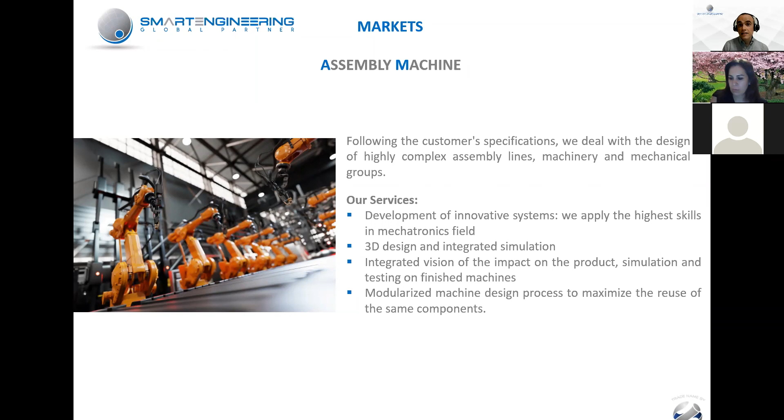The pharmaceutical sector could be considered a particular area of the packaging and assembly sector. Pharmaceuticals require basically the same competencies, but with higher attention to clean design, final product, protected environment, and extreme accuracy and reliability.

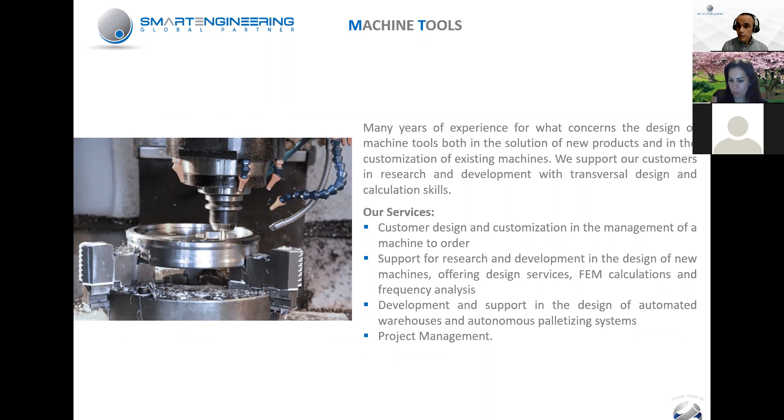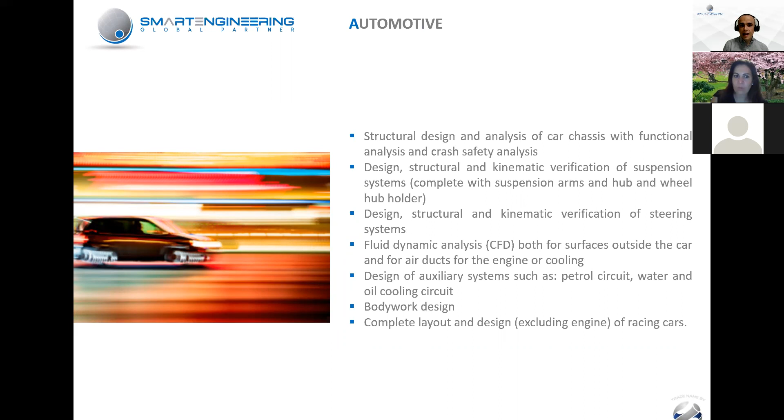Oil and gas markets require high skill in structural design and verification. Machine tool requires experience in the most precise and accurate movement solutions and structural calculation. Automotive requires very high skills in calculation, analysis of structures, and fluid dynamics, but also surface modeling and bodywork design if necessary.

In the end, in the defense and aerospace sectors, the strongest skills are requested in every engineering aspect. Due to the specific conditions, customers here request the best of modeling, from modeling to fluid dynamics, passing through material treatments, etc., because performance and reliability are for sure the most important features of defense and aerospace products.

So, our academies are the strategic heart of our learning organization. Candidates we are hiring are recipients of training and, most importantly, of our corporate culture. We identify the portfolio of skills required by businesses and develop and train them to become professional engineers. The goal is to empower and make productive the high skill of our resources using innovative methods and programs, on-the-job training, and mentoring with high-level professionals.

The course of our academy is structured as follows: 2 weeks of lecture in classroom, 2 weeks of internship in one of our offices. At the end, the new employee will continue his path within a working group where he or she can continue to grow up and develop his or her skills with satisfaction.

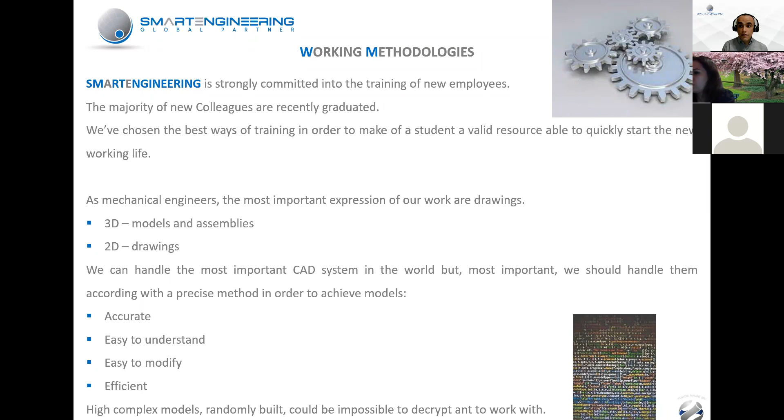Our goal is to give a specific mindset spread to all colleagues, which allows them to receive any model and be able to work on it without loss of time. This is in order to be a quick responding company for our customers.

The key point of this method works on the very low level of modeling, the bidimensional sketch preparation. It consists of looking forward, foreseeing how the final drawing could be, and preparing it as it was a drawing. It means basically putting lines and dimensions as they must appear on the final document. This lets the designer respect dimension, coherence, and order.

Think of reference for future production processes, think about technology construction, and think about choice of raw materials. But the most important aspect is the training on people's mindset and techniques.

This method also speeds up final drawing production using the CAD dimension recovery feature. Moreover, training on thinking forward allows designers to increase the ability to build in their mind the idea of concept and solution of a machine, and easily transfer this mindset to all aspects of a project.

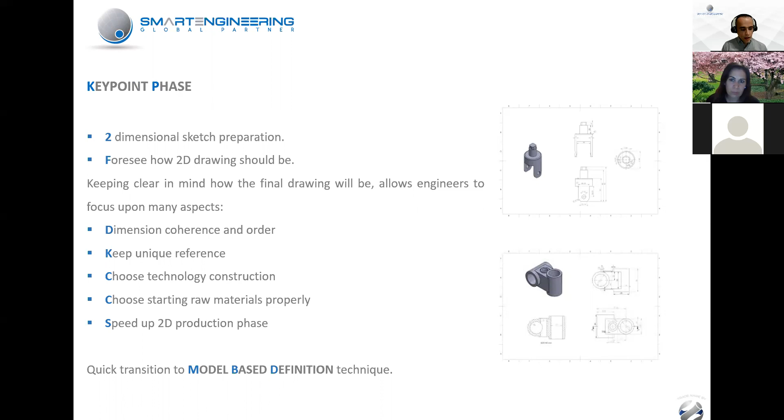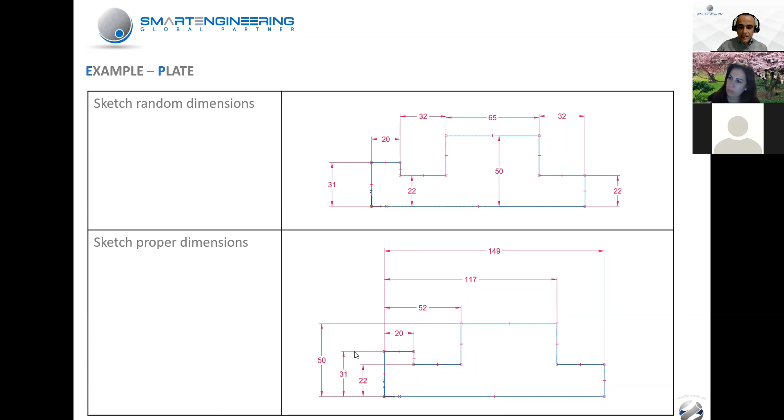Here are some examples of sketches and models which could be done with and without our method. Please take a look. We can see sketches completely defined in both pictures, but below, dimensions have the same reference here, are ordered from the smallest to the largest, and could be easily found during modification.

Please look here. When we highlight a sketch to do some modification, we can immediately see and recognize which dimension is related to the specific line.

Because it is frequent in our activities that models are passed from hand to hand, from a colleague to a colleague, or for example from a colleague to a client who makes some more modification as well, it's very important that a model is communicative. This is to be efficient.

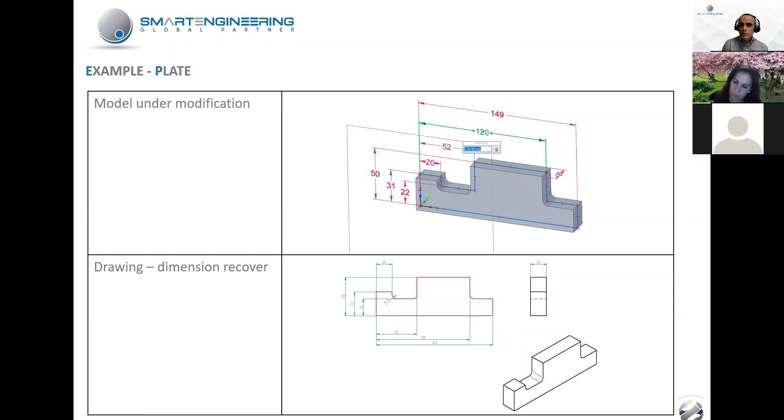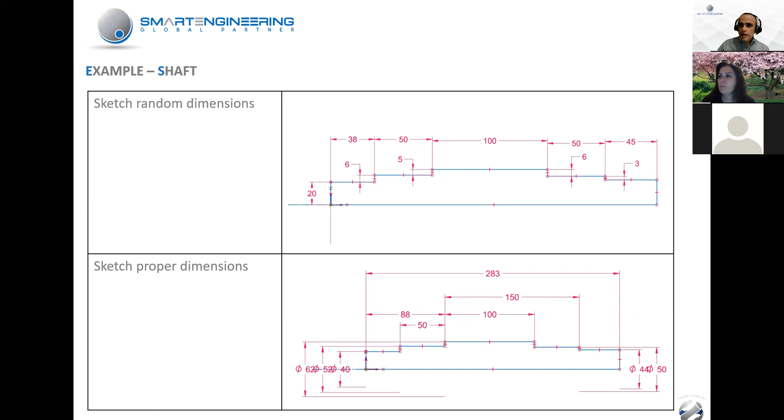Here a second example. We have a shaft instead of a plate, but basically the method works exactly the same. Linking dimensions properly gives a great value added to the project and to the model. There are many other aspects to work on during a project, but keeping the model communicative gives the right basis to work on.

Moreover, this method lets the designer keep focused on design and not on the model, so they can reach goals and targets easily.

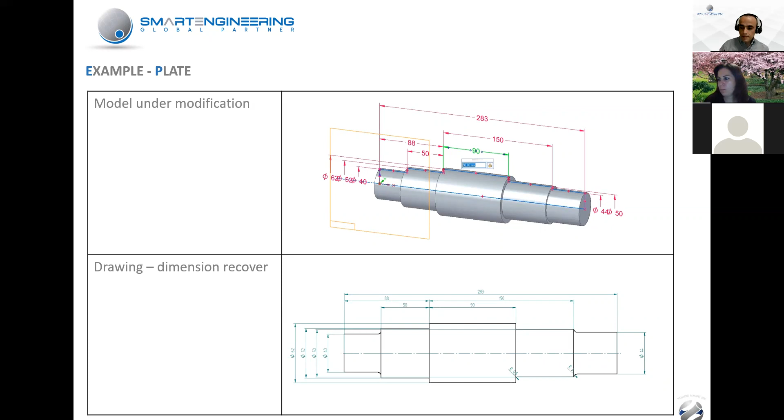In conclusion, this method requires discipline and practice, but it's very easy to teach, and people can begin working on it immediately. Advantages are tangible from the very beginning.

People who are trained do not think anymore about modeling because it becomes an automatism, so they can focus on idea, solution, and innovation.

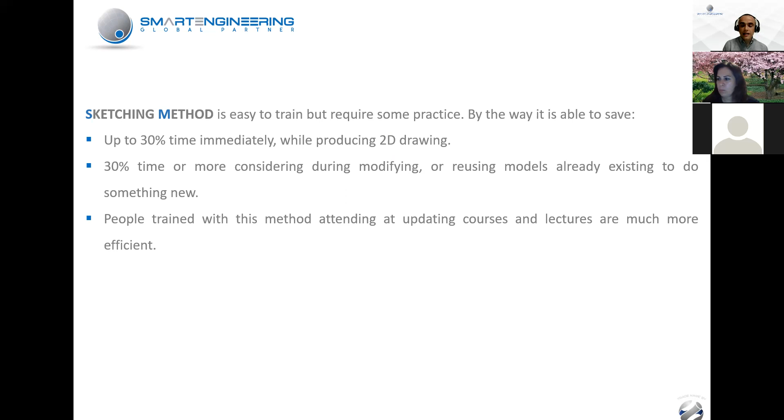This method can save about 30% of time producing drawings. It can save also about 30% of time or even more during modification on models. It allows, and is strongly suggested, the reuse of existing components. And in the end, new designers are more efficient during 3D updated courses and lectures.

So this is a presentation of the basic method that we use in order to be a reliable partner for our customers. It's really just the beginning, because the method didn't stop here.

We work on people to let them understand the working reality. But for us, even what could appear a small detail has a great value added to the model, and we are pleased to share this with everyone, in order to let people know how our method is focused even on the smallest detail.